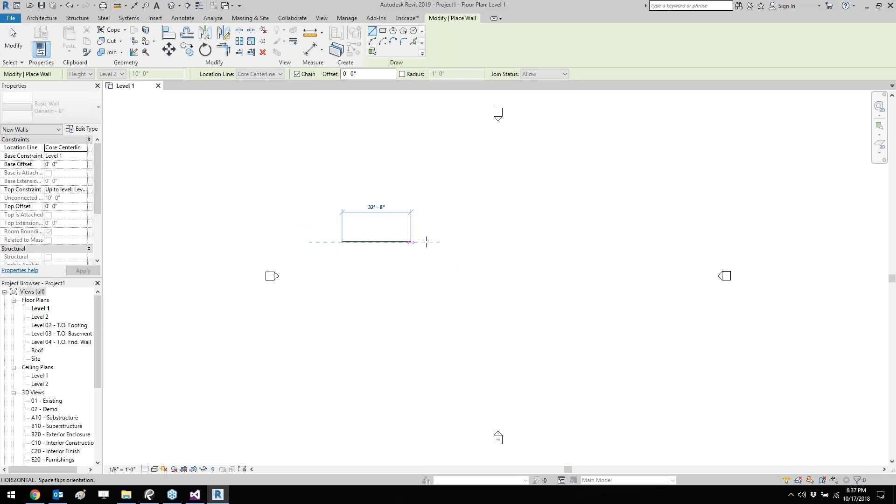I'm going to be building a lot of architectural walls. Okay, here's an architectural wall, right? I'm going to do Revit. I'm going to do Dynamo. I'm going to open Dynamo. I'm going to load my DLL. I'm going to wire in. I'm going to pick that. I'm going to wire it in. And what should that node say?

You got to yell it out because where's all the energy here? You're not excited about this stuff? I'm turning you into programmers. Holy smokes, you know how much pain and suffering? I had over 100 examples. I had to cut it down to 8. Yeah? Okay, so holy smokes.

My goodness. Okay, so anyway, new. Here we go. Am I gonna load this in every time? I am, I'm gonna do it. I'm gonna try, I really am. So here we go. Category. Okay, here we go. Debug. Okay, here we go. Boom. There it is. Okay, I won't go over what these are again because you know. Get category, bang. Yeah, so Revit.

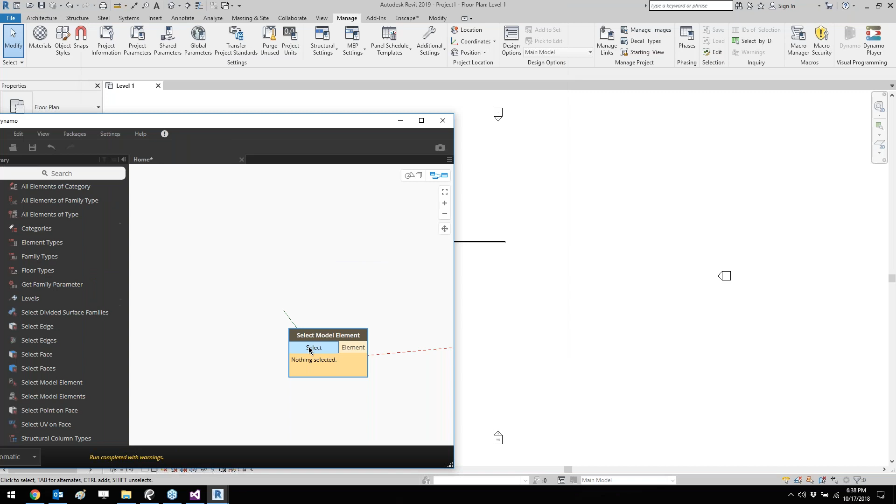I need to feed in what? A model element, right? So I'm gonna pick this. I'm gonna pick the wall. I'm gonna go like that. I'm gonna wire this in. I'm going to roll it out and cross my fingers, and boom, there goes wall. How cool is that?

Right? You want to see that code again? Oh my gosh. You want to see the code again? That went pretty smooth, that took 9 minutes. Oh, we're doing good. You want to see the code again?

Why? Because of that thing right there. You see that? Do I need to emphasize the power of that thing?

Okay, get an object, press period. It's going to expose a lot of stuff for you.

Okay, good. Now this is named for a reason. This is what we call a wrapped Revit element. Now we're going to have to talk about Revit API and Dynamo speak. So the way it works, I might get a box, like a wrap box. But Dynamo only speaks one language. It doesn't understand Revit. It has to actually take a Revit model and wrap it in a pretty package, in a pretty bow.

When it does that, sometimes it writes with a Sharpie marker on the outside and it says, this is your category, you are a wall, you have a bounding box of this and other things. So when we press period, we only saw a few things. Did you notice that list wasn't like 500 things long? There's so much with a wall, because it happens to be wrapped in this Dynamo shell. Why is that done? There's a lot of reasons why.

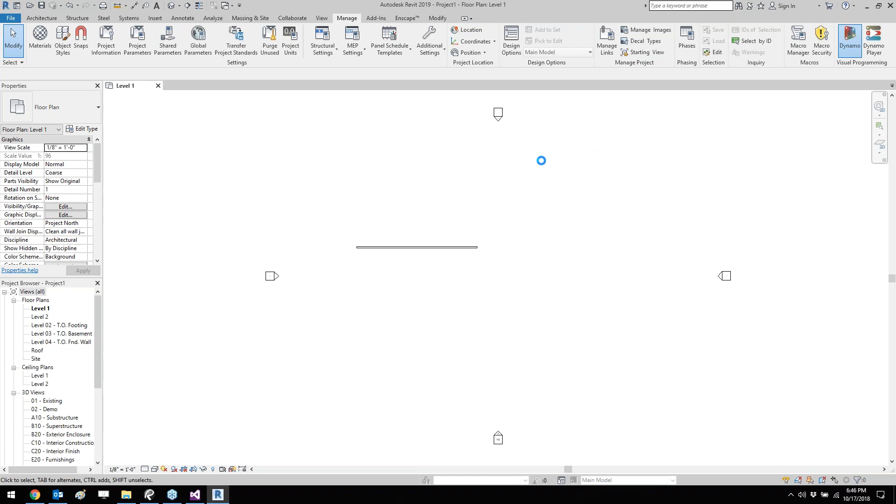So what do we expect when we open Dynamo, load it, pick model element, load in the model element? Anyone? What do we expect to see? The ID. Check that date, I keep saying that because I've gotten burned before. Get ID, Revit element, Revit selection.

I suppose these could be preset ones I open up, but then I'm debating if I do that, it could cause some confusion. Did you get it? Okay, here we go. Moment of truth. Whatever this pops, better match that. Boom. Yeah? Cool. Now this just happens to be a node you like, woohoo, right?

There's a custom node that does that, Marcelo. I mean, an out of the box node that does that, of course. But we just pulled the ID, we unwrapped that thing, right? We looked at the internal element, we got the ID. But you don't have to get the ID, you can get all those other beautiful things, yes? And you return those with their specific type. Any questions about that? No?

Okay, you want to make it progressively harder? Just going to keep going up the ladder. Okay, no questions? Okay. So this so far, and then if anyone wants to comment on our pace or how we're doing this, feel free. Like if it makes logical sense to step this way, right? Because I can't go straight to telling you how to build a structural building with a bunch of framing using the API, using Dynamo nodes. The code would be this long, right? We gotta work up to it, yeah.

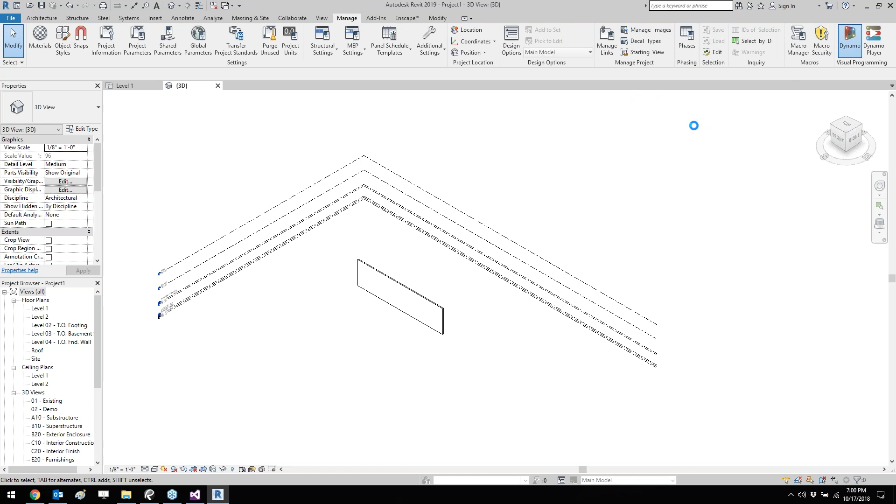That's what we're changing, remember? And then we just kick the element back out again. We didn't need to wrap it up. It's kind of a trick actually, but done all the time. Okay, so yes, I'm going to load the DLL every time.

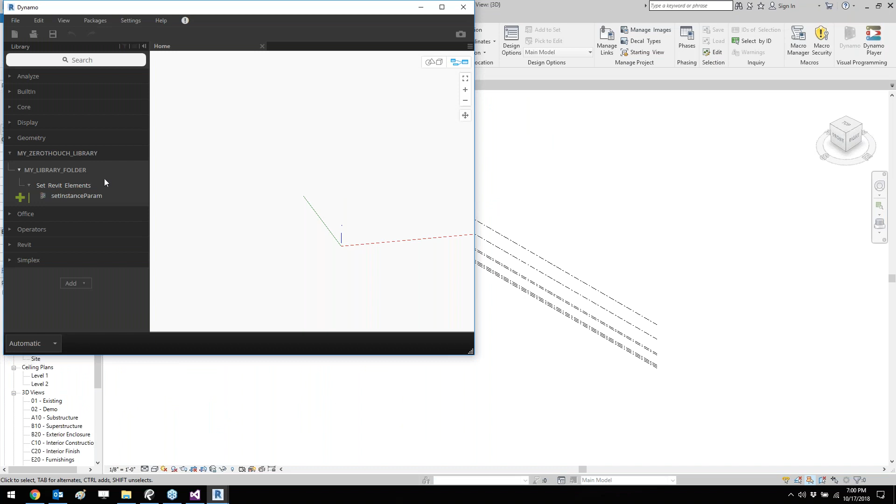I like to do this too because I can check and see if the date has been changed. That is critical. Cool, it's a minute old. Yeah, set parameter. Ooh, there's our in value. There's our in Revit element. Okay, so let's do it.

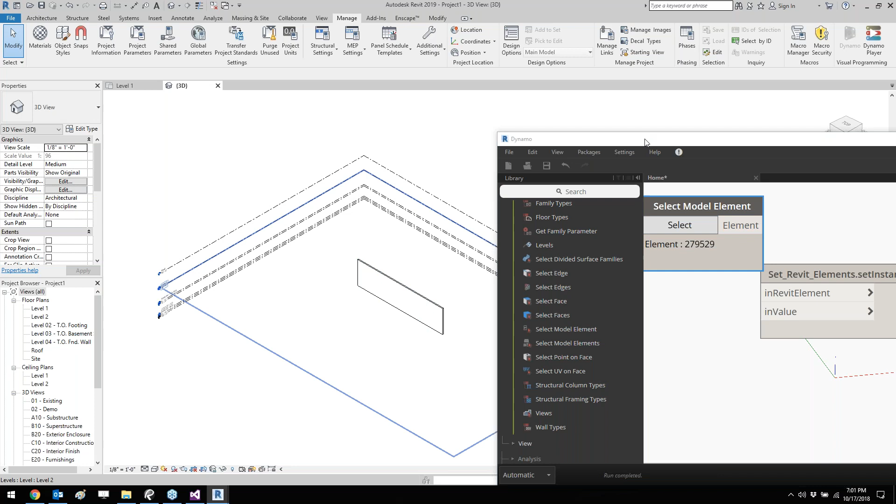Revit selection, selection. And by the way, my style is to be very hands-on demo. So I don't do a lot of PowerPoint. It's just kind of all pick and click. I hope you're okay with that. All live demo for me, which means things can crash and mess up.

Okay, so now we did not put a default on this, did we? Okay, here's a quiz if you've been listening. If I wanted to put a default on that value, how would I do it?

Where? You're a programmer, aren't you? You can't answer. You're not? Okay.

Yep, I put it right here. Let's say you always want it to be equal to 0. You would go equal 0 right there. I don't see why you'd probably want to do that, but you could. I'm just saying. Okay.

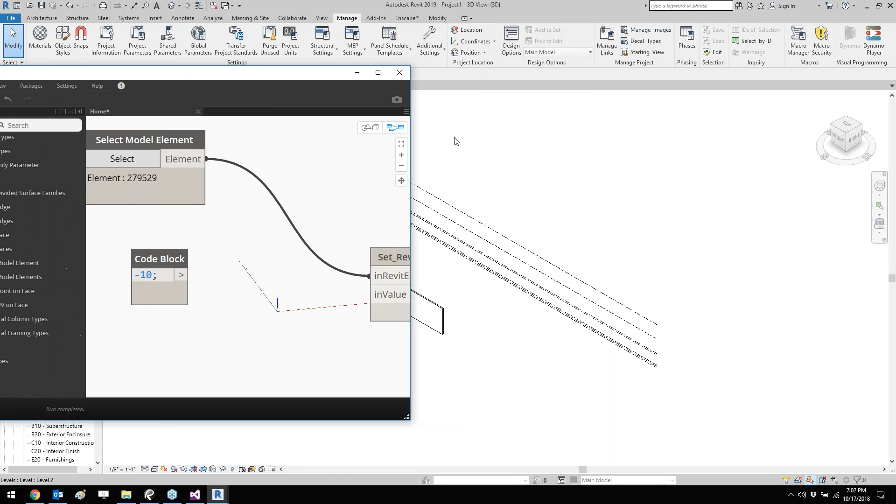Okay, so we're going to feed in this. We're going to say, I don't know, -10. And pull here for dramatic effect. Bang.

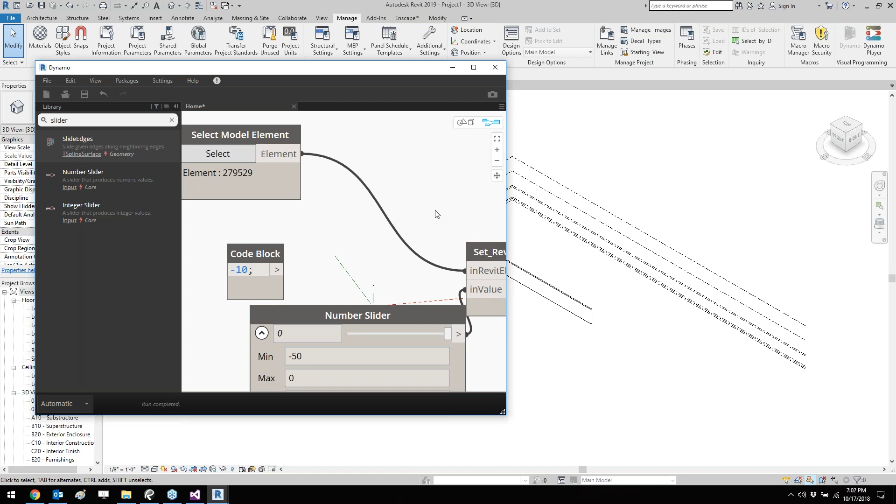Slider. See, now when you built this, you're like, that's mad. Right? You're like, oh man, how do we do this? I guess we can go minimum, what, -50, max 0, right? There we go.

And then just kind of, just do this all day and bask in the awesomeness of C# coding, right? You don't think that's cool? No one? Come on now. How cool is that? Come on now, you ever give applause here? Okay, don't force it, don't force it. I need to know if it's genuine. I'm taking notes here. All right.

Would you say anything I showed you so far is overly complicated? I mean, in concept. You know why? This is my opinion. Dynamo very much mirrors C# coding and the way C# coding is. You have hard types, you have hard input ports, and you have hard returns. So it's easier to grasp this, I think, in my opinion.

And Zero Touch was set up this way. The developers actually built Zero Touch this way. There's other ways to make custom nodes with C#, they're called UI nodes, they're rather complicated. But Zero Touch was built this way to really make it simple. And so my job, I'm hoping, is to bring it to the masses. Some people disagree with me and think it should only be for coders, but I say, that's what people told me in 2014 when they said Dynamo should be for everybody. And I said, we'll see about that.

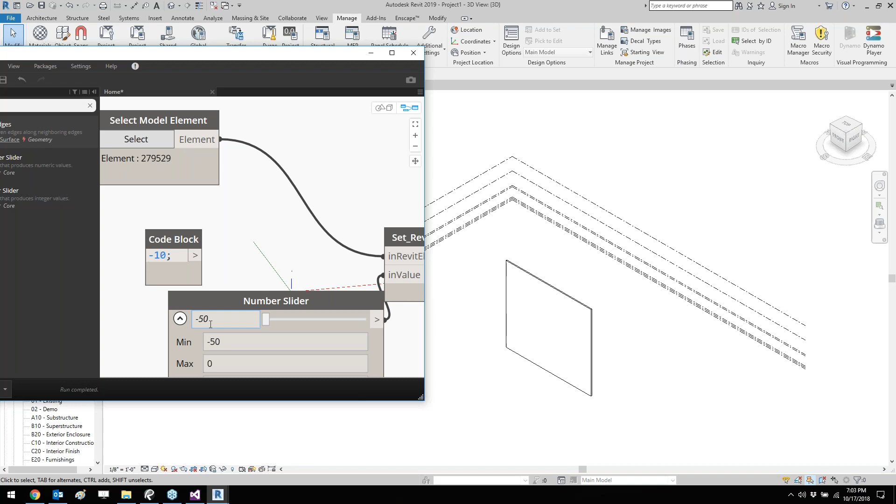Okay, cool, how are we doing on time? Oh man, by the way, these examples, I'm flying through them. I love it. Okay, so now, where are we?

Okay, so you want to kick it up a notch? Oh boy. Okay, so we set, hey, we got 3 more. Want to see 3 more? Okay.

Now let's abandon the walls. Let's review, okay? We pulled a value off the wrapped element, one that was sharpied on the side. Do you remember what it was? What was it? What type did we pull off? Category, remember? The category is written on the outside of the wrapped element. So this is the category.

It's walls, right? They send you a pretty box. I'm going to actually do this. I'm going to get a big box I can drive to Vegas with this from LA. I'm going to build it. I'm going to get a huge wrapped box. I'm going to write walls on the outside. I'm going to write other things on the outside so that you don't need to unwrap it to get that data.

Element comes in, press period, boom. You can read everything on the outside of the shell of the wrapper. So we got category, which was on the outside of the wrapper.

I'm trying to review so we can see where we're going. Next, we peeled open the wrapper. We pulled out the internal element. Yep, that's the scientific way of saying it, I suppose. Also, some people call it the unwrapped element.

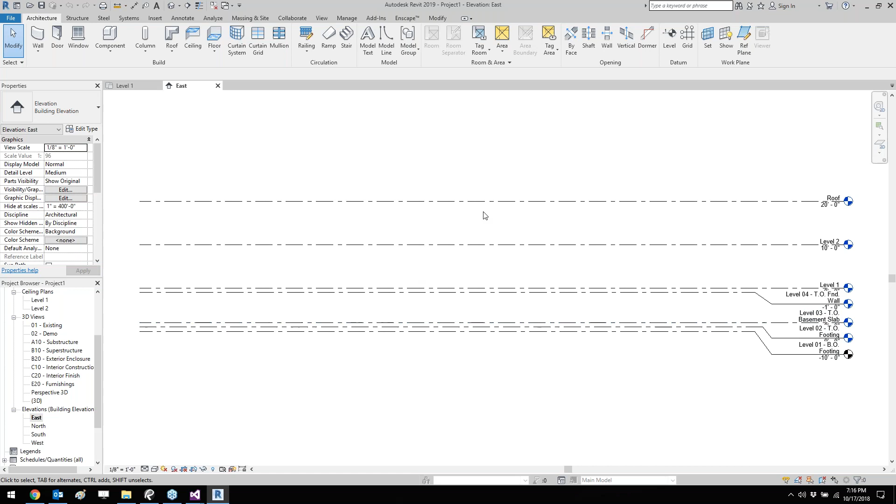Okay, here I'm gonna delete some of these. So let's make a level at level 10. What do you say, does that sound cool? Like, how exciting, right? Because we wrapped that darn thing up. I wanna see if it works.

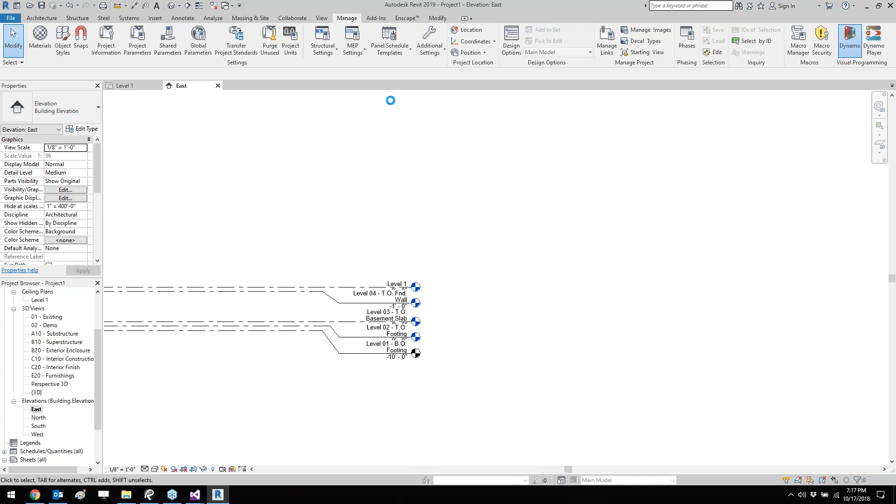By the way, if you send an unwrapped element out to Dynamo, it is not happy at all. Has anyone ever seen it say Autodesk.Revit.DB something as an output coming out? That means that darn thing wasn't wrapped, that's what that means, okay? So now you know, so next time when you're at your next Dynamo party, you'd be like, can you please wrap that up for me. That makes no sense.

You're like, you know what wrapping is? Of course we know what wrapping is. You're exposing the internal element. What are you doing? It's in the Revit Dynamo environment, you're supposed to expose that stuff. Come on, yeah, I'd be like, whoa. Awesome.

Is there a node you can port it through? The answer, is there an auto-wrap node, is what you're asking? Yes, in fact I made one, but I found it completely useless, because if you're not conscious of what's wrapping and unwrapping, then you're not doing it right, in my opinion.

Okay, really quick, hang with me okay? Hang on, you got your butts to catch, just hang on. Okay, check the date, cool. I'm gonna have to speed this example up because I am taking a while on it, I'll figure that out internally how I do that.

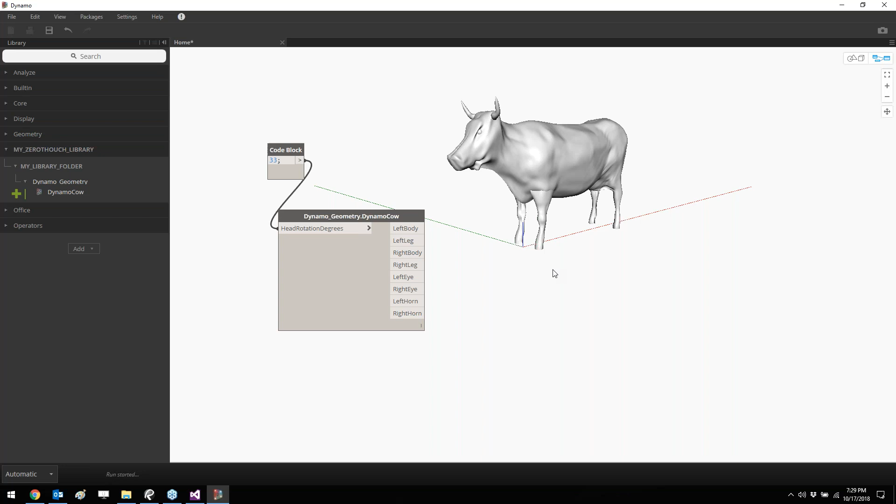Oh, so cool. All right, so the point is that you can build a point and work up to a cow. You can pull a category off a wrapped element and work your way up to something awesome. You can unwrap an element, pull an ID, and get beautiful information. You can unwrap the internal element and get all these beautiful parameters. You can unwrap and look at the internal element and set all these amazing parameters, right? When you set, you have to wrap, you have to bound it in a transaction, right? Or you can build something from scratch, and when you build something from scratch you're changing the database, so make sure you bound it in a transaction. And then when you're done, you better wrap that thing back up and send it out, right? Because it's by nature unwrapped, right?

But you don't have to build a level, right? You could build something great, like an entire building if you like. It all starts with that single point, and then you end up with something like a cow.